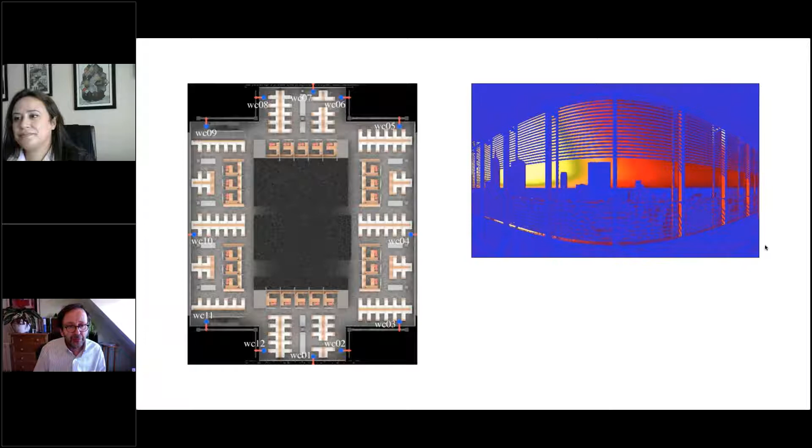But first, let's have a look at a landmark project using climate-based daylight modeling. This was the New York Times building, which I did back in 2004-05. You can see the astonishing amount of detail that was in the 3D model that was used for this. This was even before the term climate-based had been coined. A vast amount of simulation - we looked at the simulated view from multiple viewpoints on multiple floors.

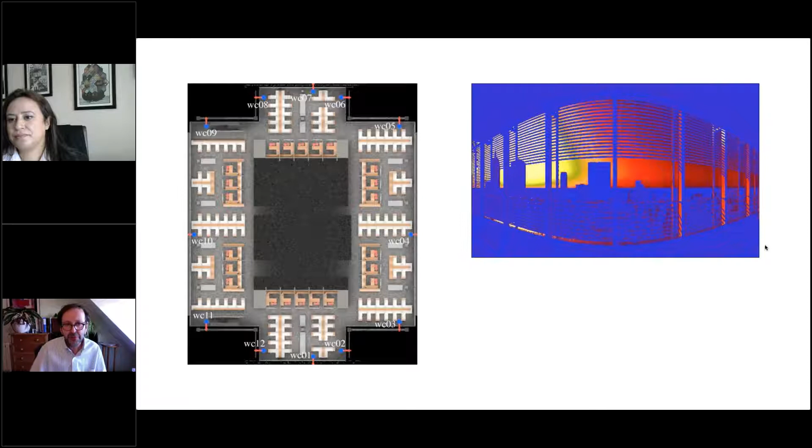The aim was to balance the provision of daylight with the control needed for the roller blinds. So most of the building had a fairly clear aspect and open views. The idea was, through simulation, to design a control system which would achieve this balance between control of solar and glare and the provision of daylight. We knew it needed to be automated because if it's manual blinds, the blinds come down and they stay down.

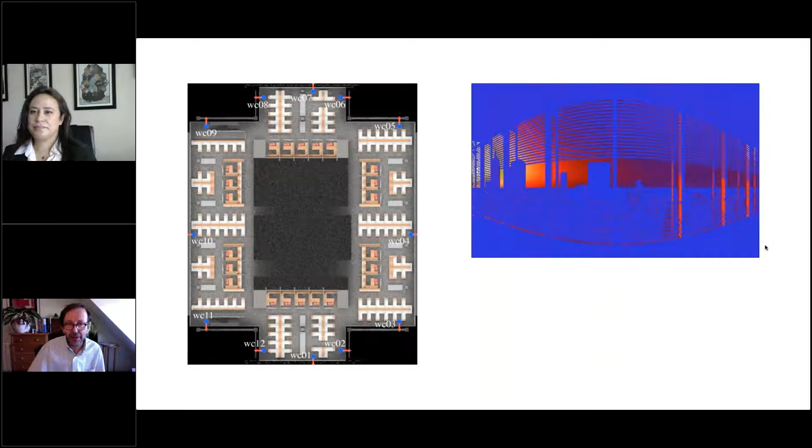There was a post-occupancy study carried out a number of years later after the building had been occupied, and by and large it showed that the occupants felt the building worked well. But does that mean that the values I was simulating were similar or the same to the luminous environment experienced by the people in the building? That we don't actually know.

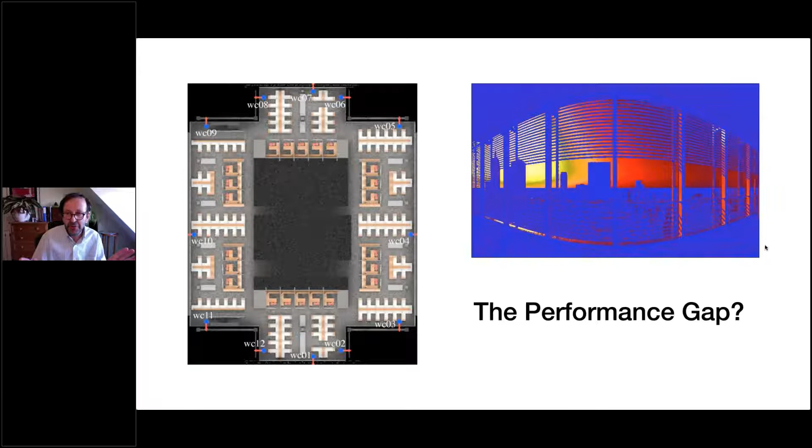We know from thermal simulation that there's a big difference between simulated performance and real performance. In dynamic thermal simulation, we can look at the energy performance of the real building and compare it with the numbers we simulated, and we often see there's a big difference. With light, we have no idea what that difference might be, because we don't routinely record measures of luminance or illuminance in buildings. So we carry out simulations to refine designs, to push them in the right direction, but we're never certain about the absolute values unless we have some benchmark numbers to compare with. And in lighting, we almost always don't.

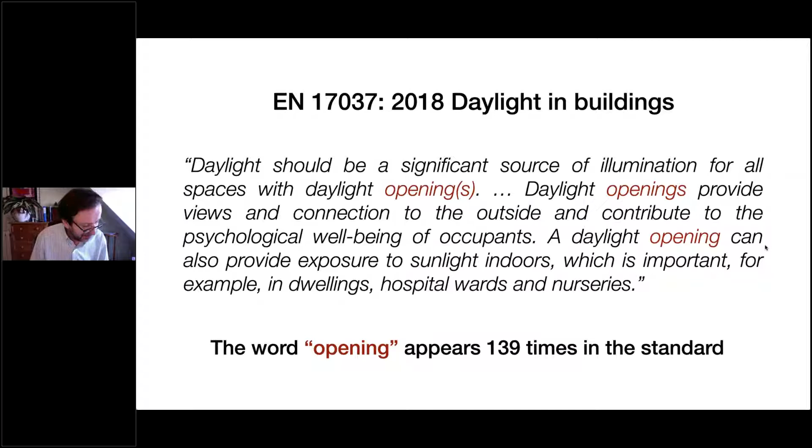Now let's just have a look at the opening of the new European Standard for Daylight, EN 17037, which, as was mentioned, I worked on. I led the development of the performance part of that. And what's striking is the word opening appears 139 times in the standard.

When you spend a lot of time sitting on a standards panel, you also become aware of all the other aspects of that standard. There were parts that dealt with daylight and sunlight planning, and this is where I felt there were real problems, because what appeared in the standard was similar to what all the various countries had—same in the UK and all the other ones I was familiar with.

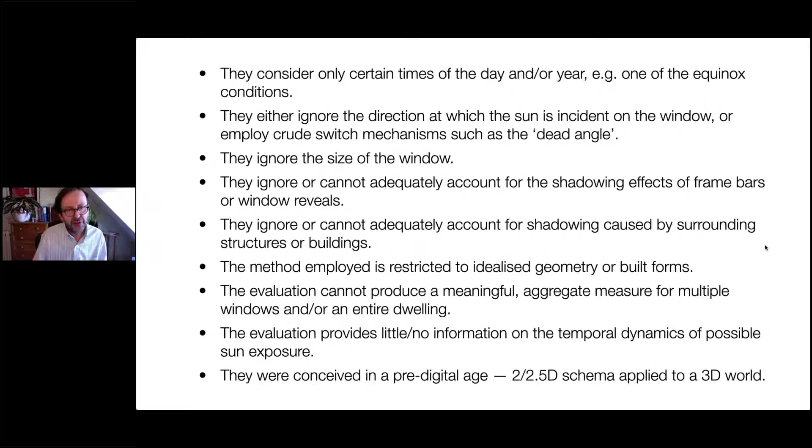But if we just look at sunlight, the measures used for planning are incredibly idealized. They only look at certain times—there's too many to go through here. But if we focus on a couple: they don't include the size of the window, they can't produce any meaningful aggregate measures for multiple windows, possibly even on different aspects, like you might have for an entire dwelling. And another key feature is they were all conceived in a pre-digital age and haven't really changed.

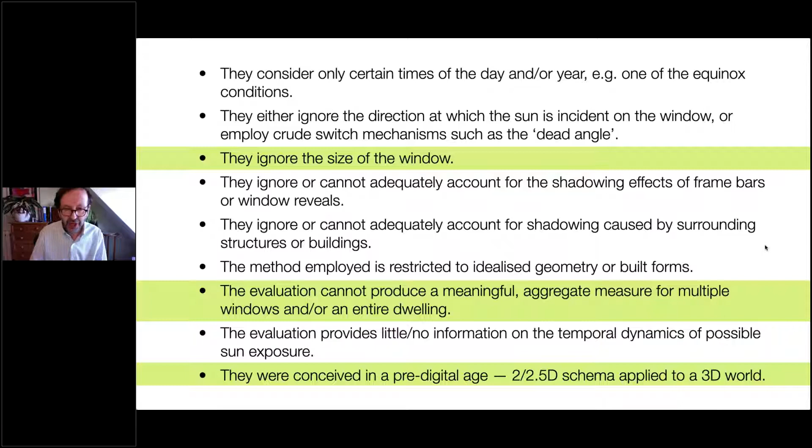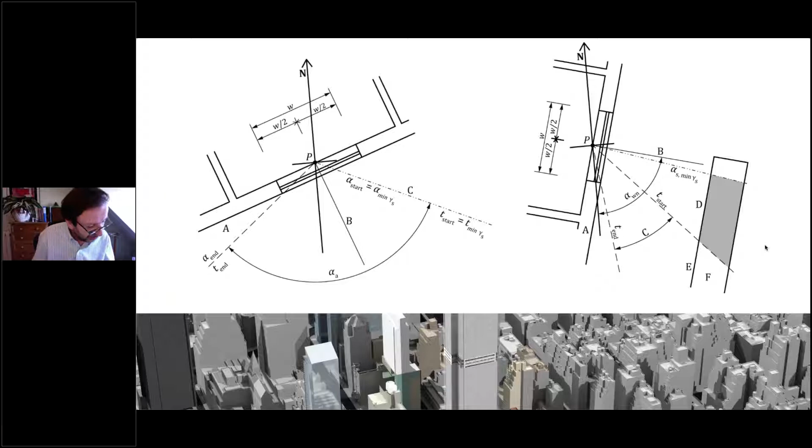So what you see in the final standard is essentially a method in plan and section form—2D. And it's not really fit for purpose for a 3D world with highly complex geometry in it. In Britain, we refer to such things as a bit of a dog's breakfast—a sort of mush of things put together that serves a purpose, but isn't very elegant. So this is dog's breakfast number one that we'll encounter here.

This made me think that what we needed was a complete radical reconsideration of how we do sunlight evaluation—total back to basics. And this resulted in an incredibly simple idea called the sunlight beam index.

This was a measure of the connectedness of an aperture to all of the possibly occurring sun positions for that locale, and for that particular aspect and its orientation, including any possible obstructing surfaces, which could be window frames, balconies, or buildings nearby. It's an area-based measure averaged across the aperture.

So if you imagine a 1 meter square aperture with the sun normal for 1 hour—just imagine it stationary for 1 hour, normal to the aperture—you would have 1 meter squared hours of cross-section area of sunlight beam that could pass through that aperture. Think of it as this time-averaged, time-integrated cross-section area of beam that can pass through.

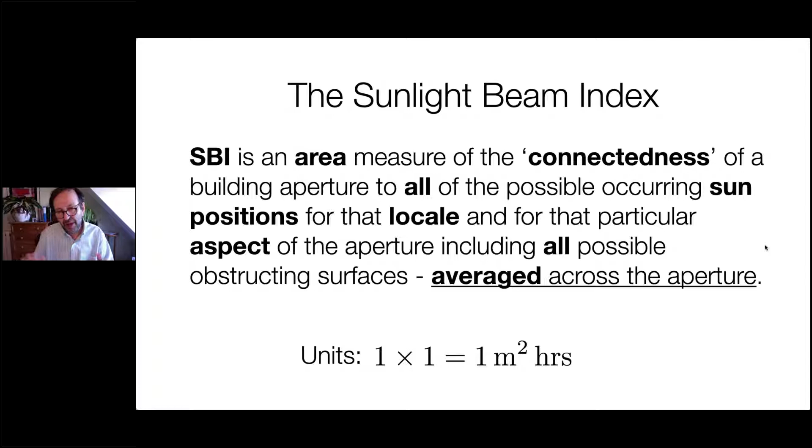So if we look at this now for a 1 meter square aperture set in a thin wall, and the same with a 20 centimeter deep reveal—it has to be somewhere in the world, I've just happened to put this in London. We look at the sunlight beam that could pass through this aperture throughout the whole year. Forget about the sky, there's no sky there, just whatever the sun is above the horizon and in front of the aperture has the possibility to illuminate it.

And we look at 8 orientations all around the compass. So if we look at that one there, south, we get nearly 2,000 meter squared hours cross-section area sunlight beam that can strike the aperture. When you have a 20 centimeter deep reveal, that goes down by a third to 1,340.

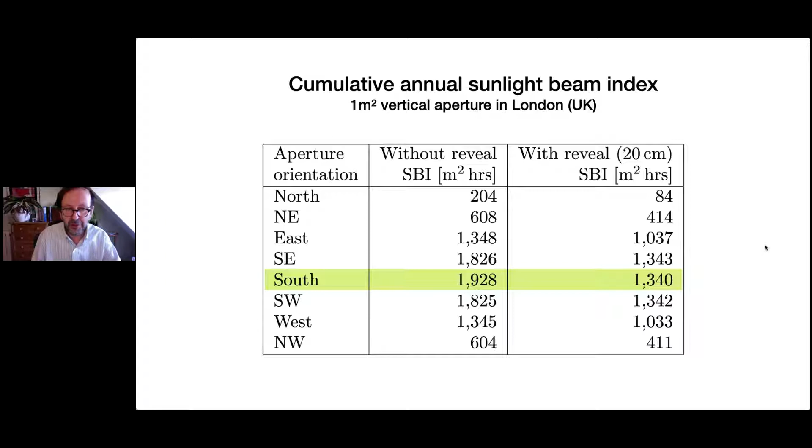And you can see as you change just 45 degrees southeast, southwest, not much change, but then quite dramatic change another 45 degrees, and then same to northeast, and even a little bit when it's facing north, very early in the morning and very late in the evening. So that's a single bottom line number, which gives you the connection of that aperture to all of the possibly occurring sunlight positions.

We've also got the temporal dimension of this. I'm sure many of you have seen plots like this before, but just in case not, we've taken all of those hours in the year and rearranged it so we've got 365 along the x-axis, the days, and we've got the hours along the y-axis.

And when the sun is above the horizon and it's in front of the aperture, then you've got the potential for some sunlight beam. And because this is south facing, the highest sunlight beam will be when the beam is nearest to normal to the aperture, which will be in winter when the sun is at its lowest. So that's when you get the most aperture, most beam coming through.

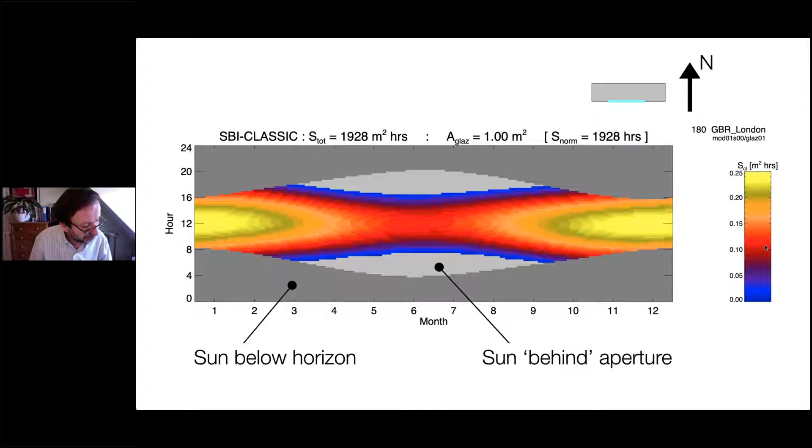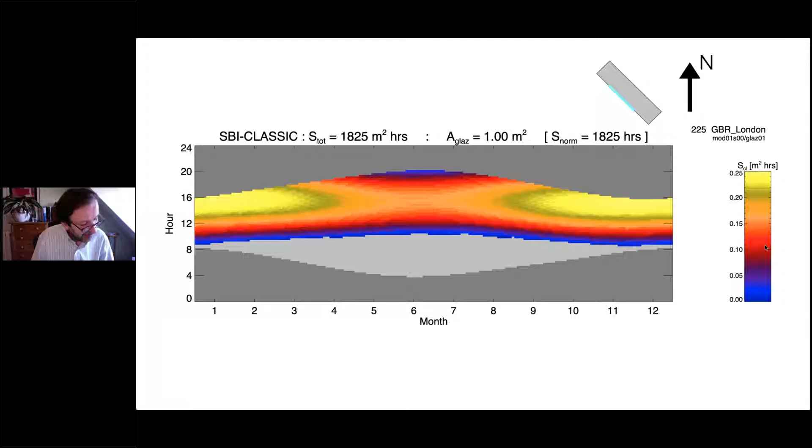Okay, so you've got that single number as before, 1,928 meter squared hours, but we can see the temporal dimension as well. If we just change our orientation by 45 degrees, then it starts to shift over to the afternoon because we're now southwest. And if we have any number of shading devices in front, it will modify it.

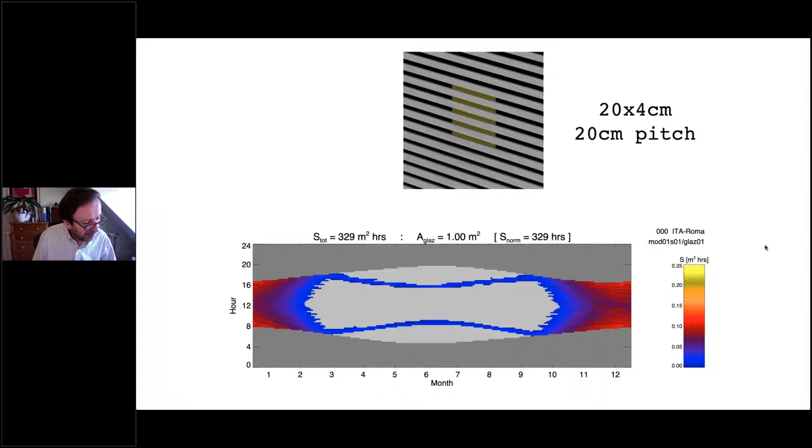We're actually now in Italy for this part, doesn't matter, small change. Key thing is that any amount of shading of any type, and you can see the single number, but also the temporal dimension of it. And this geometry can be anything in any complexity.

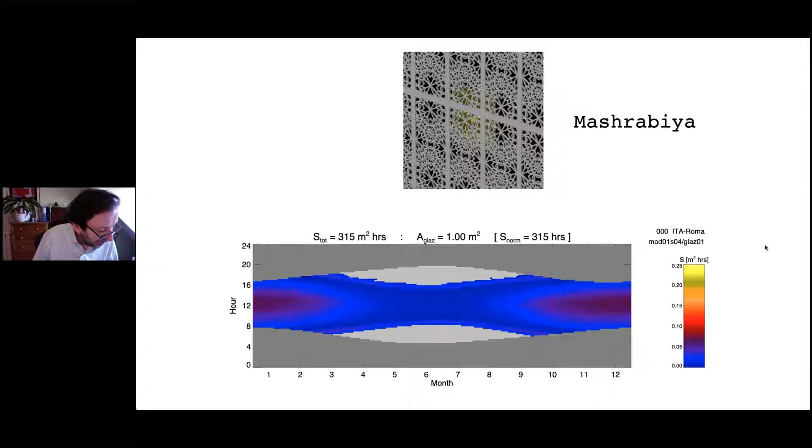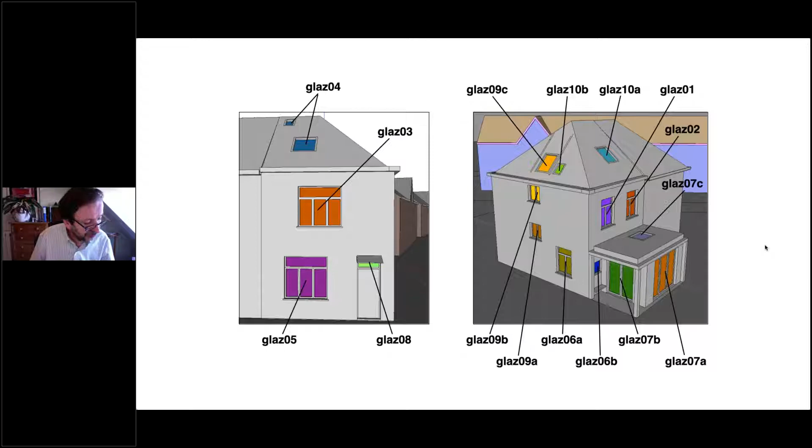Where it gets really powerful and revealing is let's say you want to look at an entire dwelling. So this was a study that was supported by the Velux Corporation. For this dwelling, simply predicted the sunlight beam for all of these glazing groups, its entirety, and then simply added all these together. And to make the temporal dimension a little bit easier to digest, aggregated it into monthly AM and PM totals.

Okay, so the total for that entire dwelling in this orientation, and again I think we're in London here, was nearly 18,000 meter squared hours. So that's the total amount of connection of all of those apertures to all of the occurring sun positions. We know we've got 25.5 square meters of glazing, so that normalized value, which is just total sunlight beam divided by the area, gives you an efficiency factor per meter square of all of that glazing and its connectivity to the sun.

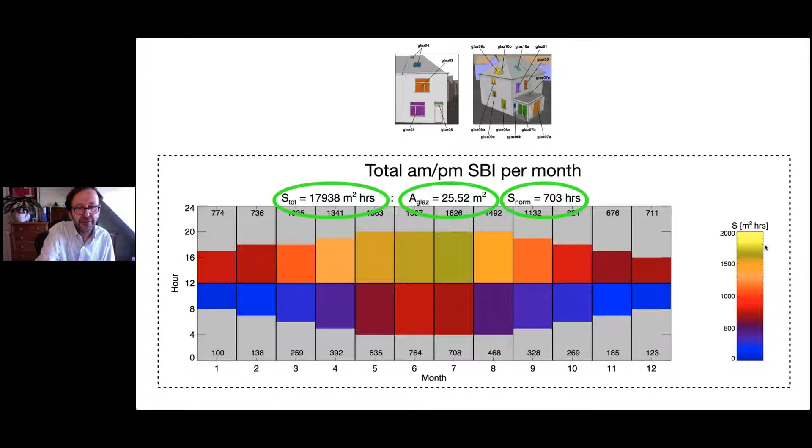So we can see, just going by the colors, that dwelling in total, you'll get the highest connectivity in the afternoon in the months of May, June, July.

And if you can imagine you were site planning a residential development, so you've got all these different orientations here, we'll show 8 of them again. You can quite dramatically see the effect of building orientation on the connectivity of all of those apertures to all of the possibly occurring sun positions.

So for 0,0,0, you can see most of those apertures are facing east, so that strong connectivity is in the morning—very little, it's all blue there, in the afternoon. If we look round to 1,3,5, we've got quite a high overall connectivity, but it's very evenly spread across there. For the 2,2,5 orientation, the total isn't the highest, but the individual AM, PM values—you're getting high values in summer in the afternoon, and in terms of overheating risk, those are the worst sorts of conditions.

So you've got a schema which very quickly can tell you about the sunlight interaction of any number of apertures aggregated in any which way.

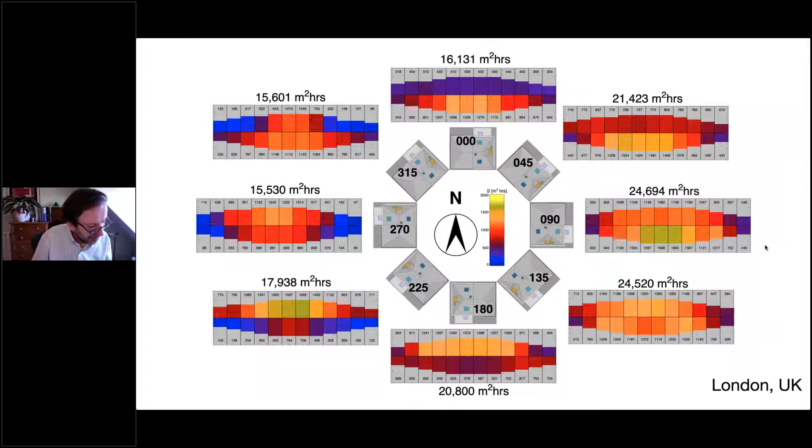And of course, it's easy to subtract out. You could take away the sunroom, say, and have a look at the effect.

So having come up with this idea for the sunlight beam index, I thought, well, let's have something equally simple for the sky. As I mentioned, my background is in physics, and physicists always think: what's the simplest way we can get the information we need?

This was in many ways much simpler than the sunlight beam index, but it contained a radical idea, surprisingly radical: to use the lumen as a measure of the connectivity of an aperture, because once you use the lumen instead of lux, you can account for the area.

So the aperture skylight index is an area measure of the connectedness of an aperture to the sky vault, in terms of the luminous flux received by the aperture from a uniform luminance sky dome. Not the CIE overcast sky - we don't want to bias this to any particular sky condition. It's about general connectivity to the sky, which can have any condition - clear, overcast, whatever.

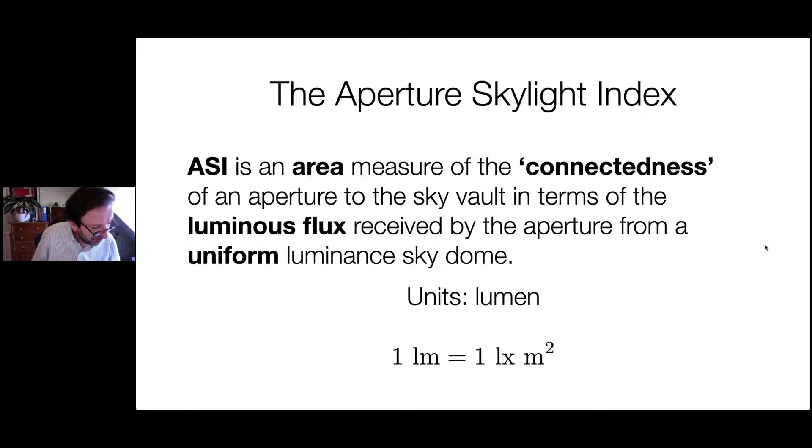The sunlight beam index had a natural normalization - the numbers just came out of this - whereas for the sky you need to apply some value. I just thought, arbitrarily, I'll take a sky which delivers 2000 lux on the horizontal. The reason is 2000 lux gives 2000 lumens for every square meter. Most windows are vertical, so a vertical window will receive 1000 lux, and so each square meter gets 1000 lumens.

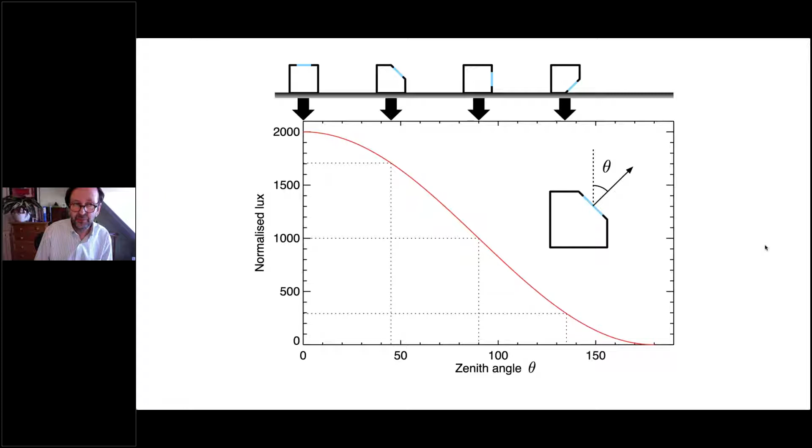And you'll see now how simple radical ideas can be. So here we are with the thin wall. It's vertical - it can be anywhere in the world, because the sky looks the same anywhere in the world in terms of how much of the sky dome you can see. So this is vertical, thin wall, so that 1 square meter gets 1000 lumens.

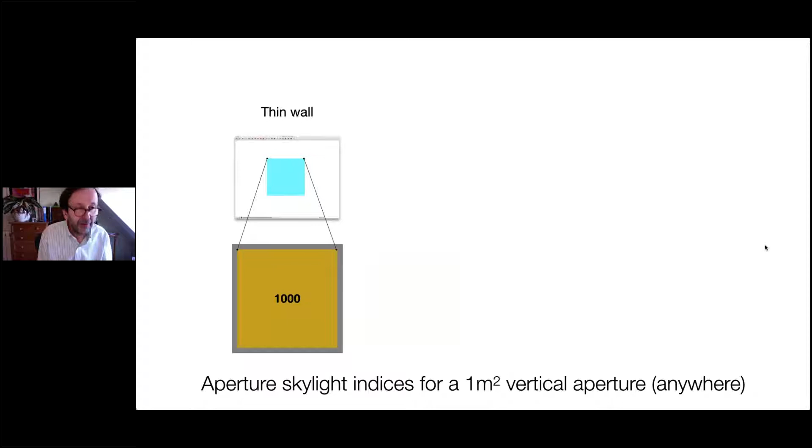When you have a reveal depth, as before, 20 centimeters, now it's 690. These numbers relate directly to the daylighting potential of that window, because as was identified by Vitruvius 2000 years ago, the view of the sky is key to indicating the daylight potential for any aperture.

Put some overhang, add some more, and there's that number - now it's more or less halved. So overall across the aperture, you're getting half the light from a uniform sky than when it was a thin wall.

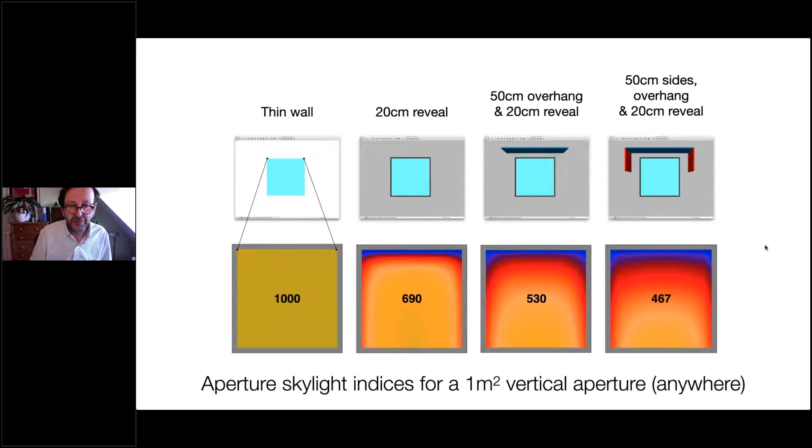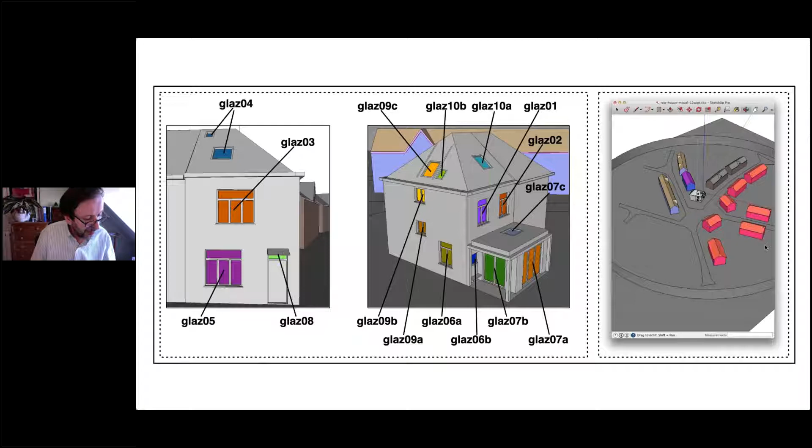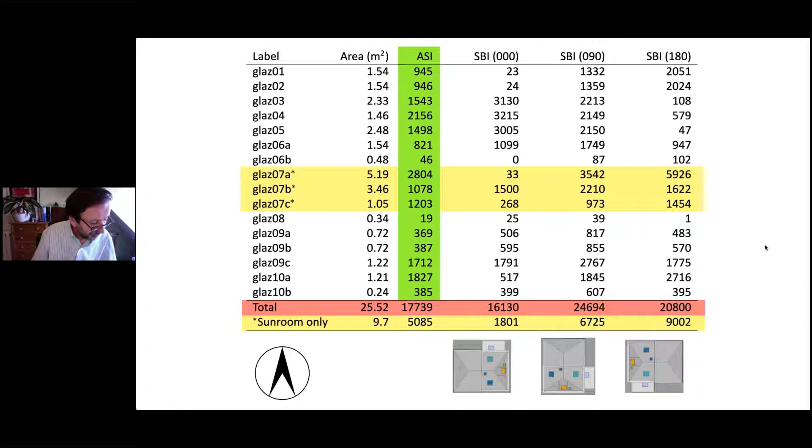But hold on, there was more messy complexity, and this is again another dog's breakfast here. Dog's breakfast number 2: the messy complexity that is view in buildings.

This is what is in the European standard. A nice view to the outside is one where we've got all 3 layers: sky, landscape - which could be buildings, nature, or a mix of those - and a layer of ground. What you have in the European standard is very similar to what was in British Standard 8206 before, and very similar to what is in the country standards for all of the EU and many of the CEN countries also.

So you've got this view dependency, which people try to account for. Now, the position of that occupant in that room is essentially arbitrary - there is an infinite number of possible positions and an infinite number of possible view directions. And so they become constrained.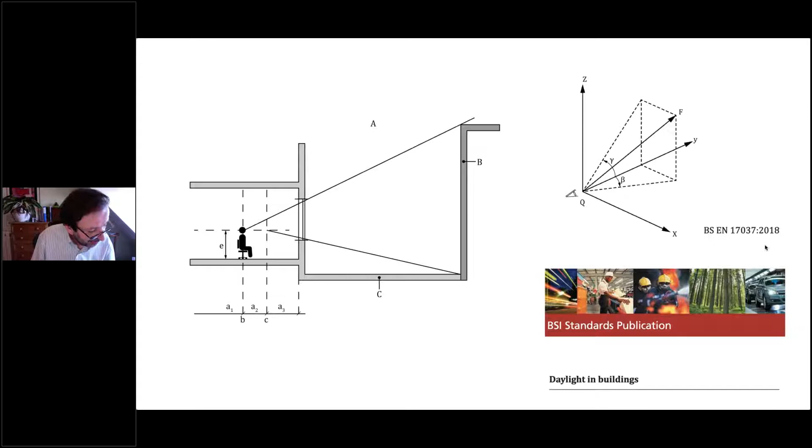And then there was one of those very rare, for most of us academics, true eureka moments, when you make an insight which changes everything. For me, it was the realization that this measure I was using for the sky, aperture connectedness, is actually equal to the view potential of the aperture. I'm using illumination, therefore, as a proxy for what can be seen from that aperture surface.

And I'll show this now. Again, here's our uniform sky producing 2000 lux, so that 1 meter square aperture receives 2000 lumens. It can't see anything else. That's what the hemispherical fisheye view from the aperture looks like. So all of its connectedness is view of the sky, that 2000 lumens of connectedness.

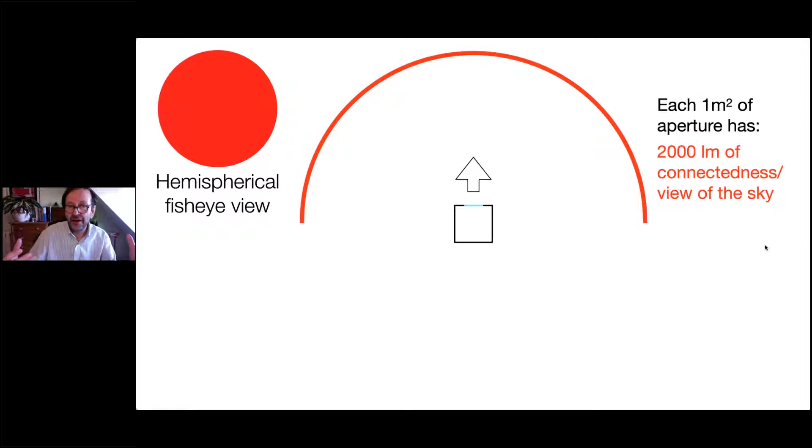When this aperture is now facing vertical, it has 1000 lumens connectedness. Where have the other 1000 lumens gone? Well, if we were to make the ground glowing in the same way the sky is, we get back to our 2000. That's what the view looks like.

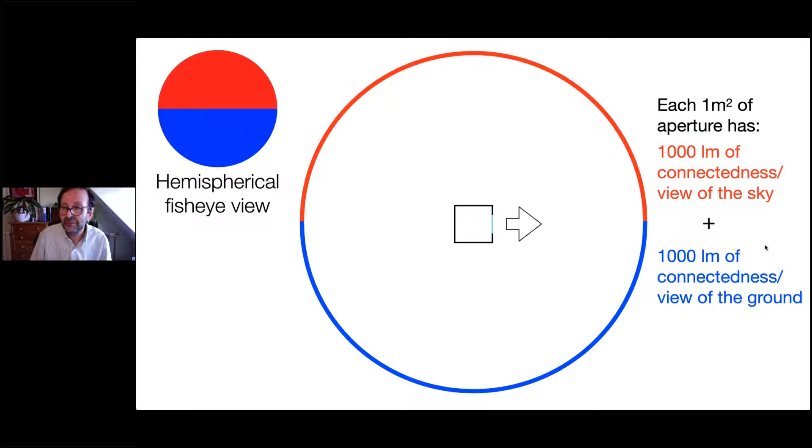Half of the view is of the sky, half is of the ground. Every 1 meter square of aperture has 2000 lumens, possible lumens of connectivity to the outside. Here we can only see the sky and the ground, so it's 1000 each, split down the middle. If we place an obstruction somewhere in the scene, it'll block some of the sky, it'll block some of the ground, so we get less than 1000 for each, and then we'll get some measure of lumens for that obstruction.

So then we get a single number that tells us about the connectivity of the aperture to the external environment, including an obstruction.

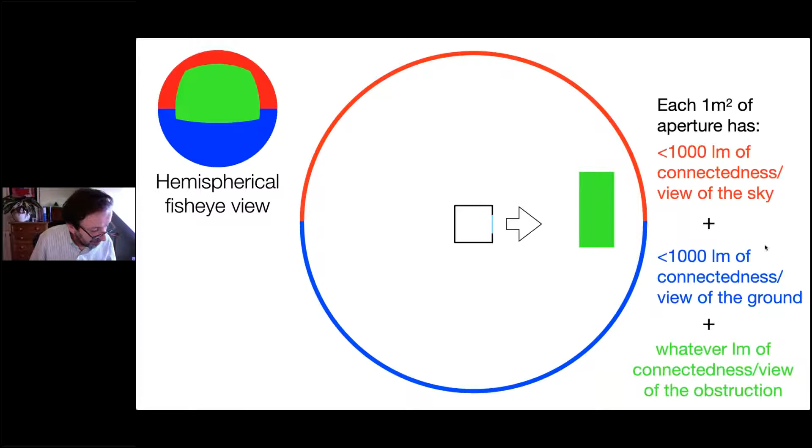So in a simulation, here I was using Radiance in an incredibly pared down, simple fashion, where I was having uniform sky and ground, and then assigning a glow to any localized ground plane, and then making the external objects, the middle layer, glowing also. And then counting, simulating those lumens that arrive at the aperture.

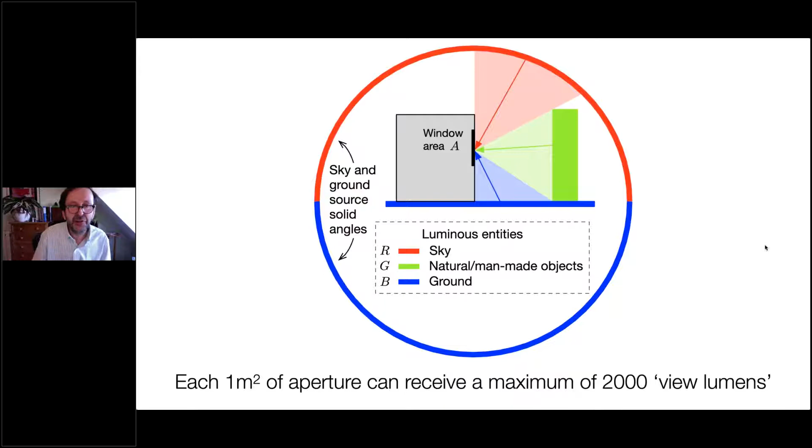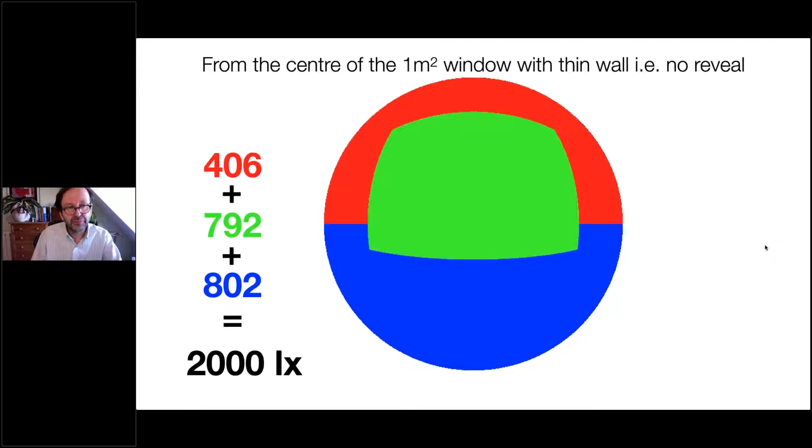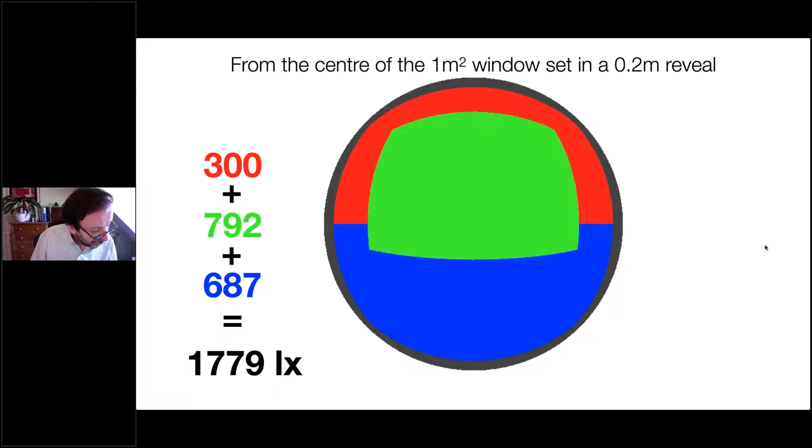So if we look at this just from a single point in the middle of the window first, we add those up and we get our 2000. So this is the lux that we're getting at that one point. If we put a 20 centimeter deep reveal there, that number drops down, of course, because we're shading around there. But that value at just one point in the middle - that's only true at the center.

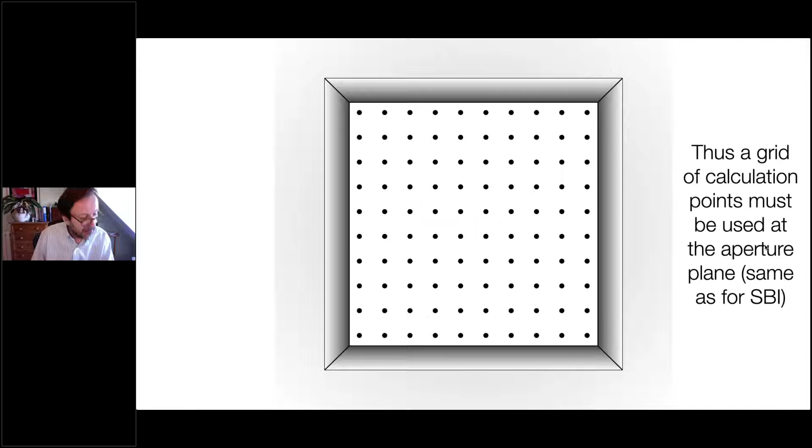And so again, just like with the sunlight beam index, the simulation is carried out at a grid of sensor points, the same sensor point grids that you have for the sunlight beam index, actually much finer than this. So you've got a simple procedure which calculates the basic quantities that you need to know, but it will accommodate any complexity of geometry that you can introduce into the simulation.

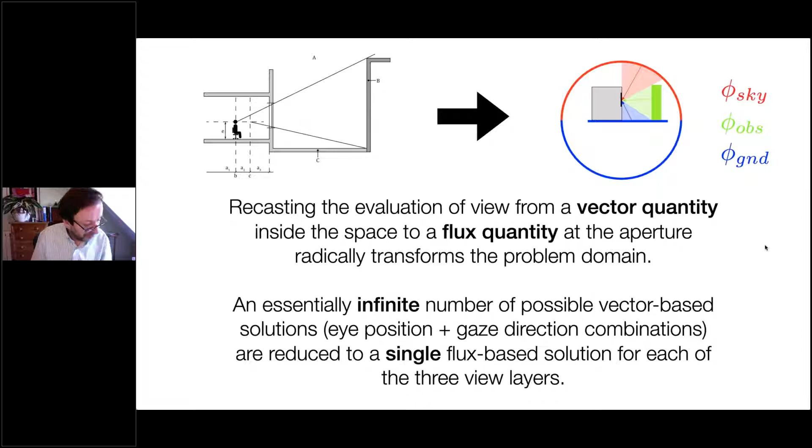For view, this now really is a radical proposal, because you transform what was a vector quantity with essentially an infinite number of possible solutions into a flux quantity. So it means you go from an infinite number of possible solutions for the internal position to a single flux-based one at the aperture based on each of the 3 view layers.

And you'll see this best in an example application where I've taken sort of like an apartment building, which we're seeing very, very common now in London, quite deep balconies, because as you can see, people are using them as garages to park their bikes and stuff. So I just quickly worked up a simple geometry with balcony overhangs, surround edges both sides, 2 big glass windows, and a depth of 1.5 meters.

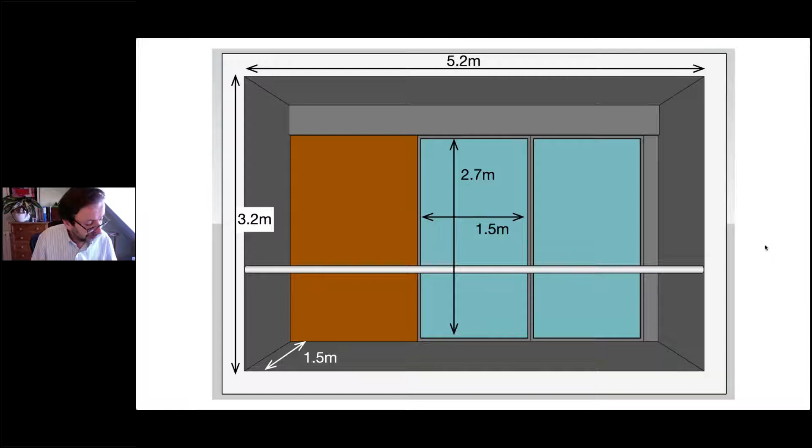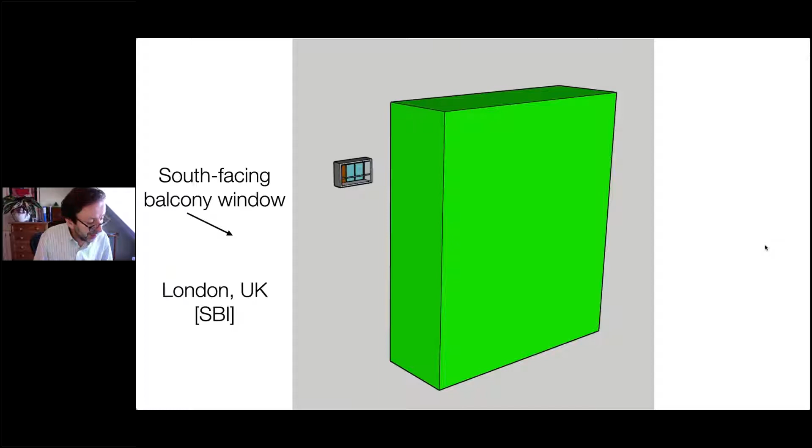And put this in a scenario now in London where it's south facing. The south facing is important for the sunlight beam index part. The other parts of the solution, though, will be the same any orientation and any place in the world.

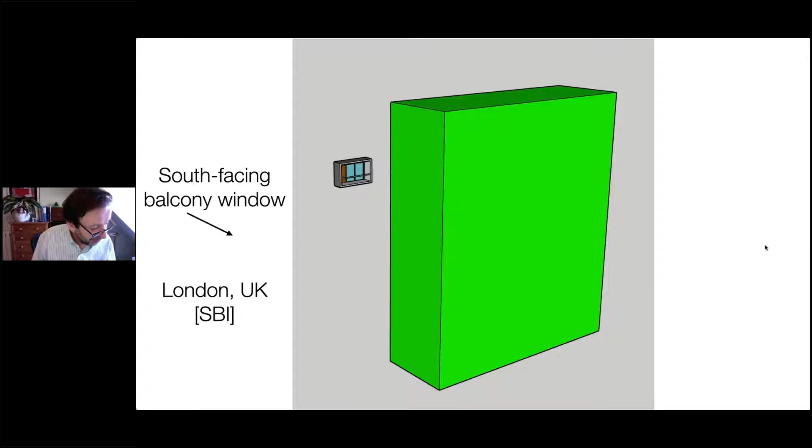And we'll look at this in a series of stages, first looking at the lumen connectivity to the 3 layers. And first, we'll just look at the glass without any balcony. So the context is the shading from the balcony and the window frames and the handrail. So no context, no obstruction - just imagine the glass floating there, and all that it can see is sky and ground.

And it's 8.26 square meters in total. So you've got 8,260 lumens of connectivity to the sky, the same for the ground, and there's no obstruction there yet. Okay.

Next, we put the context in place. So we've got the balcony, we've got the handrail, and we see this reduction in the sky lumens. We're now losing nearly half of our sky lumens from all that blockage across the aperture, and similarly for the ground as well.

Now the number that we lose is greater than the impression given from the fisheye image, because the fisheye image is only from the middle, which shows you the least worst obstruction. As you move across the aperture to the edges, you'll see more and more of the localized obstruction.

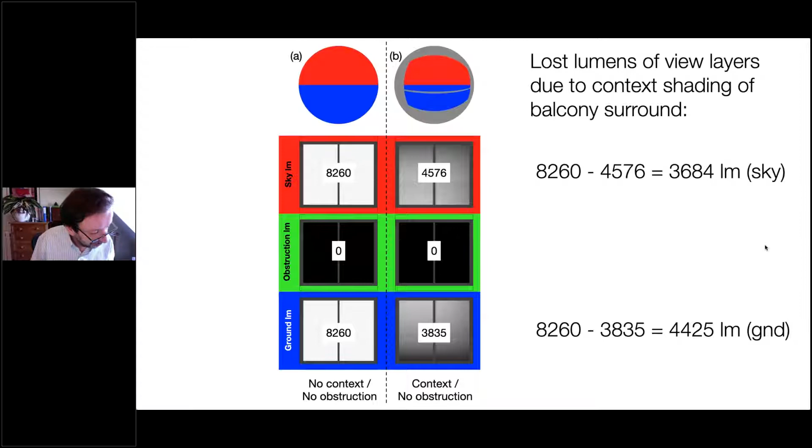For the next one, we'll take away the context and just show the obstruction opposite. So now we're getting this reduction in the sky and the ground lumens, and we've got this single number which gives this connectivity, a single measure of the visual impact of that obstruction from those two apertures.

And lastly, we put everything together, and we now have these numbers here, which give us a true area-weighted indication of the view potential to each of those three layers. And for the red layer, of course, the sky, that gives us an idea of the diffuse skylight potential for that space.

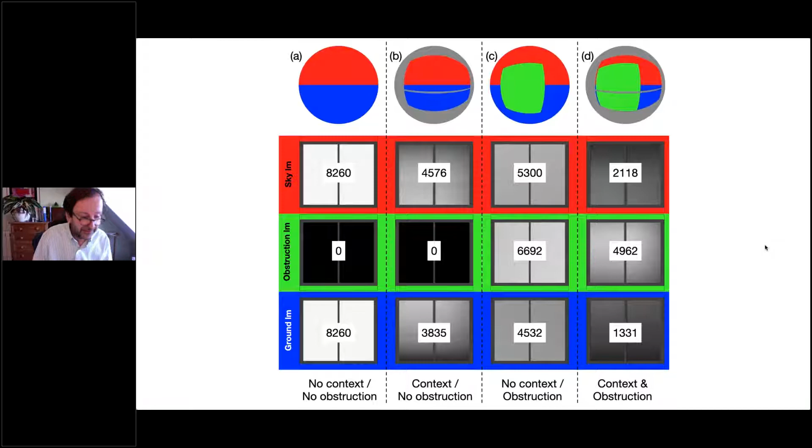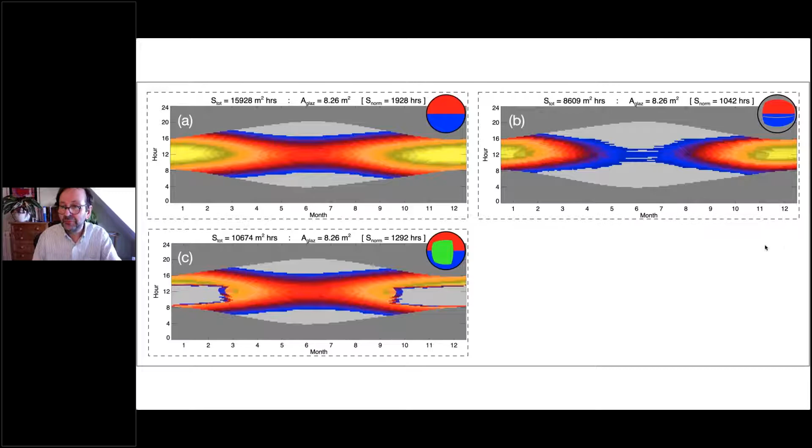Then we'll take away the balcony and just look at the effect of the obstruction. And we see it's taking out the low angle sun. Now in winter, that would be shining into the space. And finally, put everything together.

And here we've got this complete temporal description of how the sunlight beam could possibly connect with those windows for that apartment.

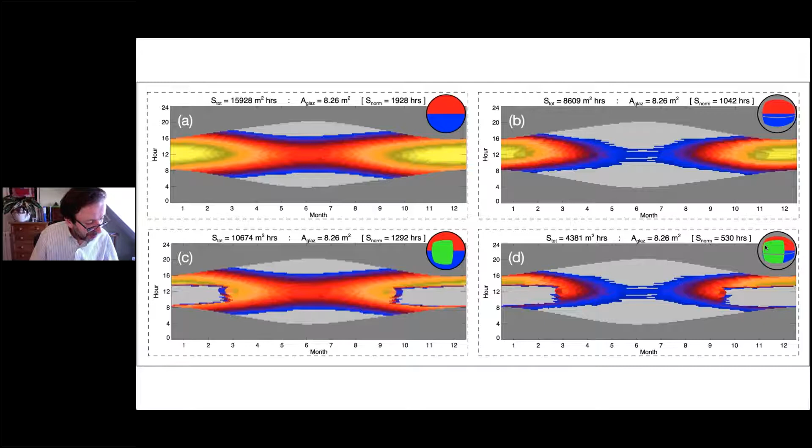So this is aperture-based daylight modeling as it appears in publications. There is a missing link, and this really is the final part of the schema. It's just being reviewed at the moment, but I'll give you a preview of this. So this is the missing link between planning and performance that really brings everything together.

Because as I'm sure a number of you have spotted already, the sunlight beam index does something which is fine in terms of geometry, but what really happens when the sun goes right down is that the intensity of the sunlight is reduced. In the sunlight beam index, I'll call it here SBI Classic, if you've got a vertical window, say facing west, the highest sunlight beam will be when the sun is normal to that window, which means when it's more or less on the horizon.

What I needed was something that connected with performance, but still preserved the geometrical purity of the method. And that's most important for the reasons I'll conclude with. Again, it was a simple idea, and that was to include the air mass in the SBI evaluation, because the air mass is essentially a geometrical quantity.

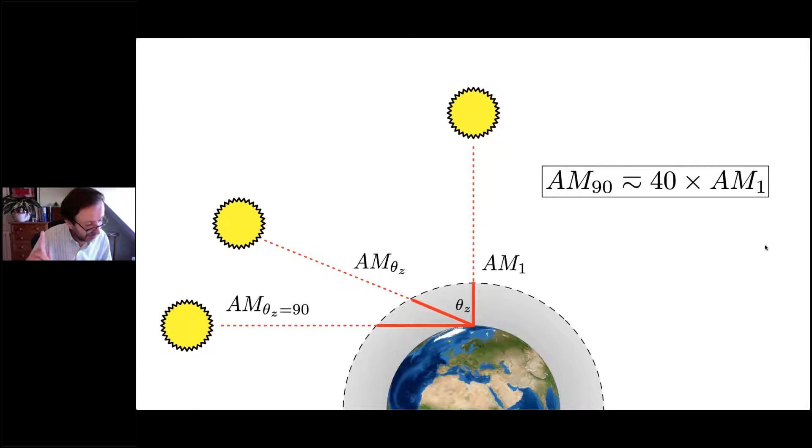So air mass 1 if the sun was directly overhead, and air mass about 40 when the sun is at the horizon. We're not including the localized effects of turbidity, evaporation, all these things which will be a signal in the weather files and the climate data, at least not yet. But this shows the transformation.

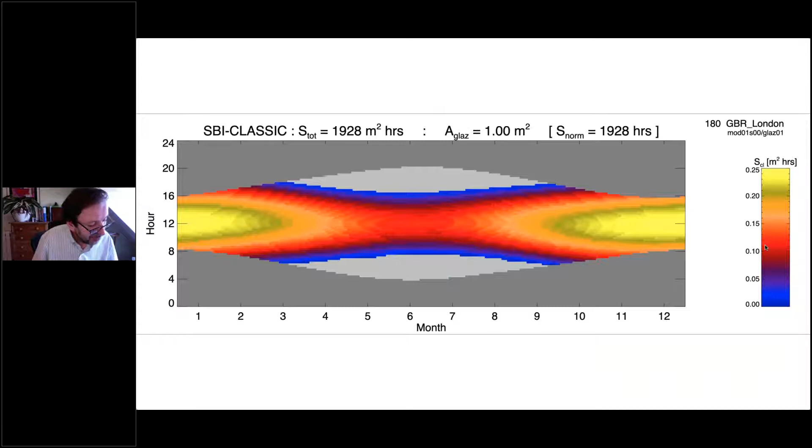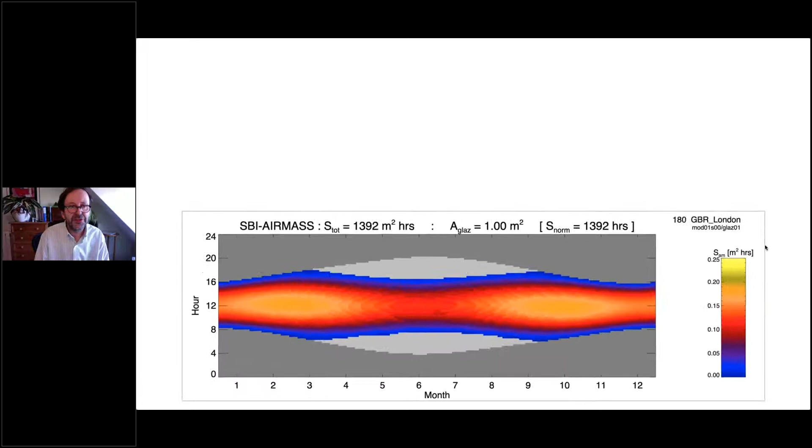So here's SBI Classic, as you saw before. And when you include the air mass, now it takes away those peaks which were due to the low angle sun at the horizon, close to the horizon, giving this large beam. So it's accounting for this diminution, prevailing diminution of sunlight intensity as the sun goes down. And when you see those things side by side together, you can see this big change here.

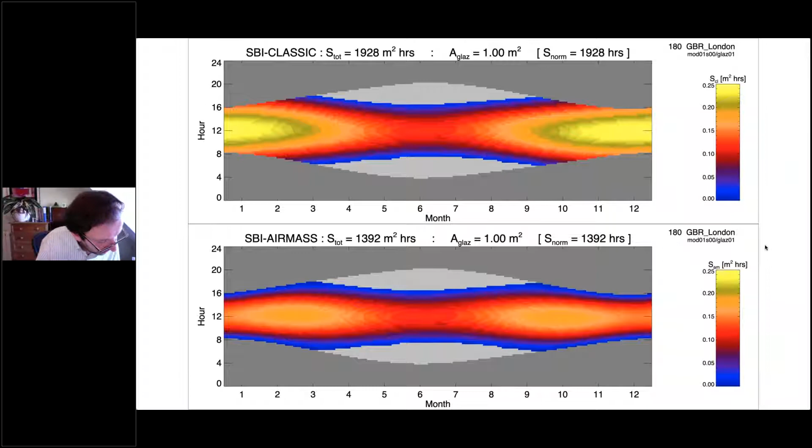Okay, now, once you've got the air mass accounted for, then I was pretty damn certain the SBI air mass would be directly proportional to the direct normal irradiation totals that you would simulate using weather files.

So I set up a simple scenario to work through a load of different obstructions: no obstruction, 20 degrees, 40, 60, and then looked at 7 orientations. I didn't bother with north because the solution for north would be similar for most of them—there's not much sunlight there.

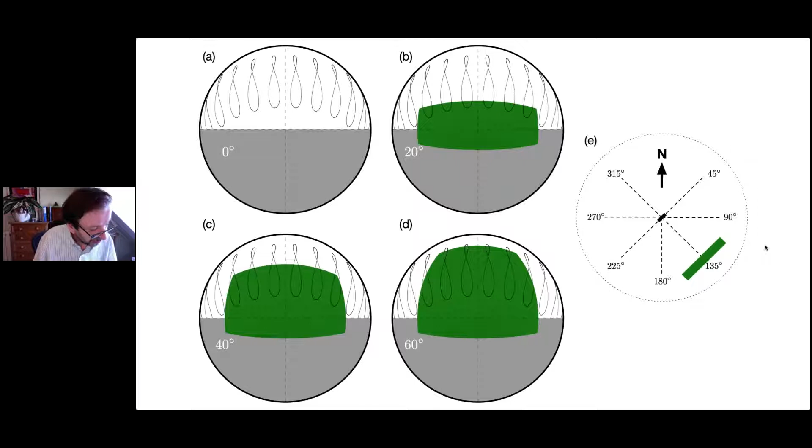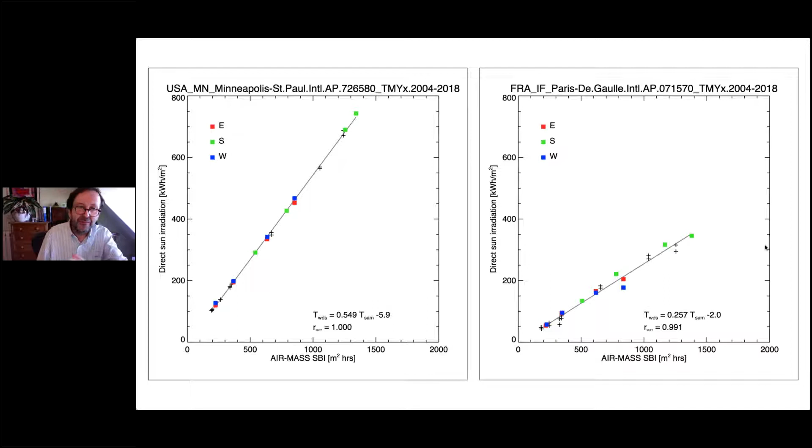The really neat thing here is that everything in the climate—the localized effects of occurrence of sun, local turbidity, cloud, and all of those things—they come down to a single number, which is the slope of that line. So it's 0.549 for that gradient in one case, and for Paris it's 0.257. For all the different other weather files you look at, you'll get different slopes depending on how sunny the prevailing sun conditions are in that locale.

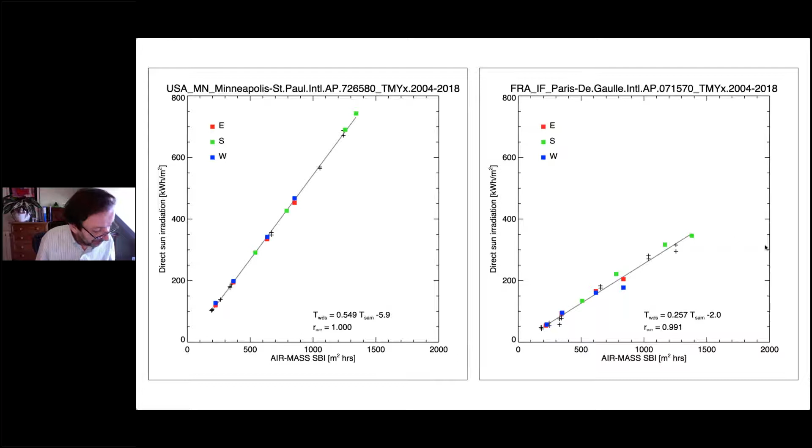So now, what that means is, with your sun SBI evaluation, you can transform with just that single factor the numbers that you get, giving you the prevailing illumination on a window. You could change that to irradiation if you were concerned about the potential for overheating risk. But it also gives you a good value for the direct normal irradiation that you would get on a PV panel. So now this aperture doesn't have to be a window—it can be any planar surface.

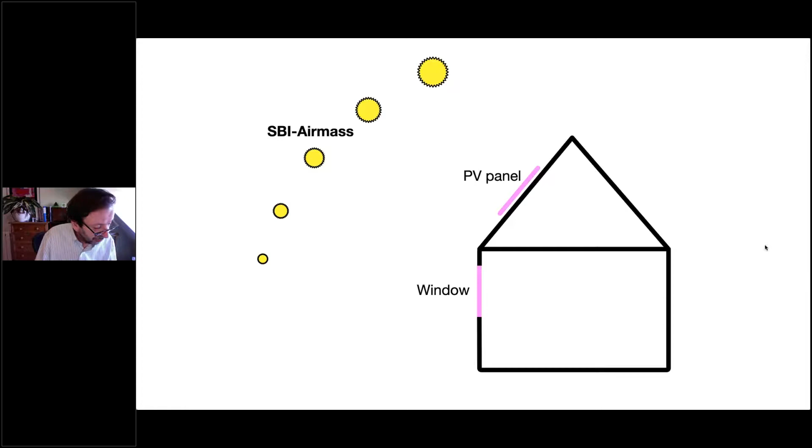So look at the whole schema now. This simple geometrical process—aperture-based daylight modeling—will tell you about the connectivity to the sun, the sky, the view layers. And this is the absolute crux of this: it gives you a result which is absolutely certain. There's no performance gap there because you're dealing almost essentially with geometry. If you have good geometry, you'll get a good result.

Now, of course, you still want to find out what the performance is like inside a space, but that's where the uncertainty comes along.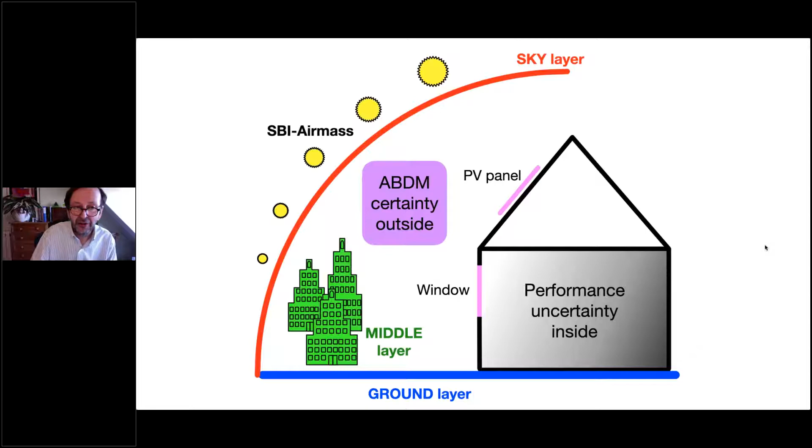Very nearly finished now. In this schematic, we can imagine, say, the New York Times building on the left. In a building like that, where you've got almost an over-provision of sunlight and daylight, the performance is governed by the operation of shading systems. But when you're lower down in the urban setting, the performance potential is largely determined by what's allowed by design and planning.

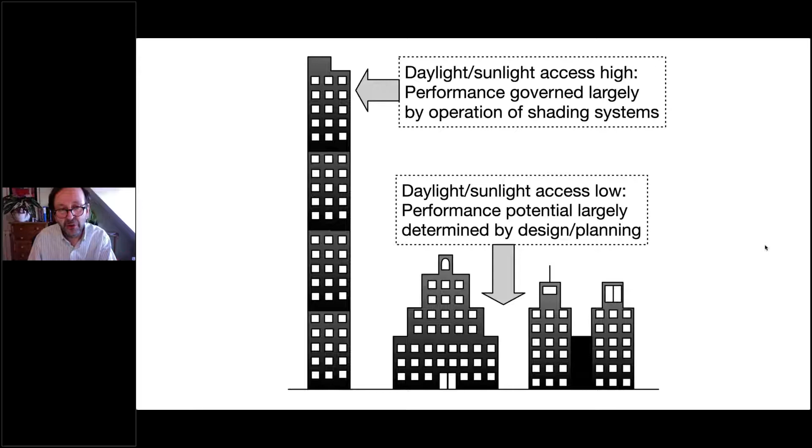Planning is the preserve of surveyors. Surveyors work with geometry. Development costs are astronomical. People can't make decisions about development when there's a high risk due to performance uncertainty.

So, for example, you can't have a decision for whether or not a building should be built facing an existing one if its outcome depended on the daylight inside that space predicted using, say, climate-based daylight modeling—because the result would depend on the color of the walls, and there would still be a largely unknown performance gap.

But if we're to achieve net zero energy buildings, where one of the priorities is localized generation of renewables rather than using renewables from distant places, then you need to bring performance considerations, which are dependent on engineering, into the planning process—performance in terms of daylight amenity value for people in buildings, health and well-being, but also systems like PV panels and overheating.

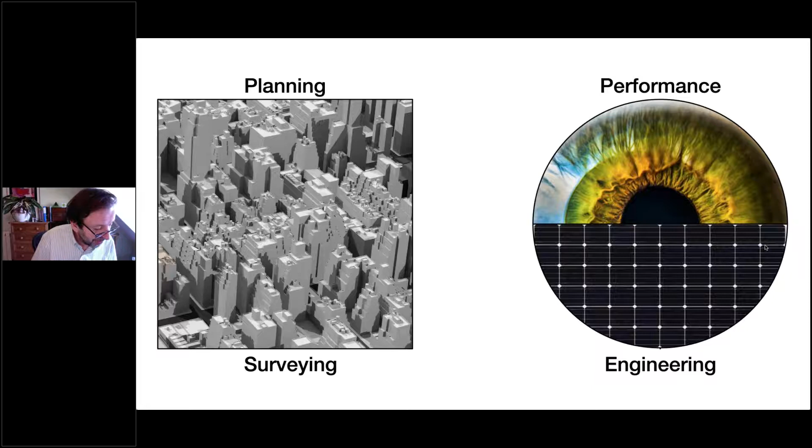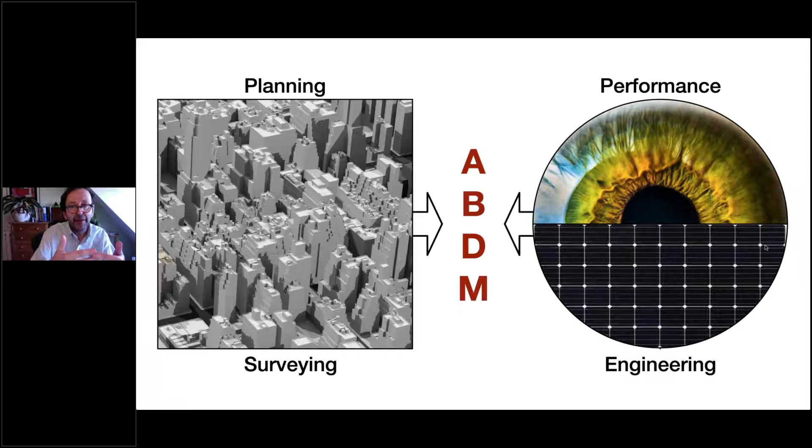And so these two disciplines have very little overlap. They don't have any space where they can interact. Aperture-based daylight modeling, which really was just a personal research project over a number of years from sitting on this panel, I believe has created a space for interaction where planning and performance can start to work together.